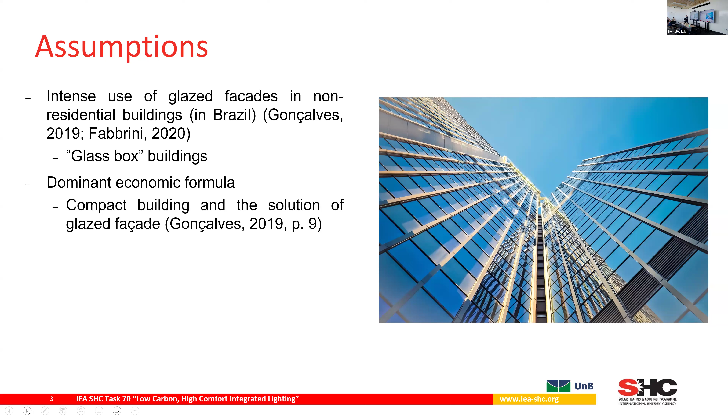Some of the assumptions of this work are that the intense use of glazed facades is very large, also in Brazil. Glass box buildings are very common, and of course the dominant economic formula is a compact building with glazing facades. If this is a problem for cold countries, imagine in sunny and hot climates the consequences.

We have problems related with glare and overheating, and this is one reason to study new, innovative materials for facades. In modern architecture we had a lot of clear glass, normally with shading protection.

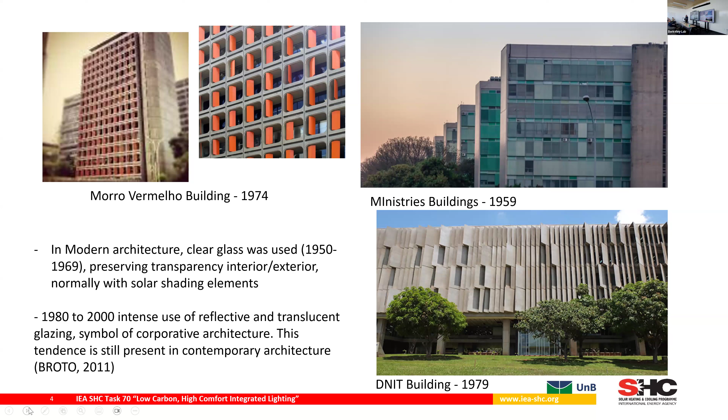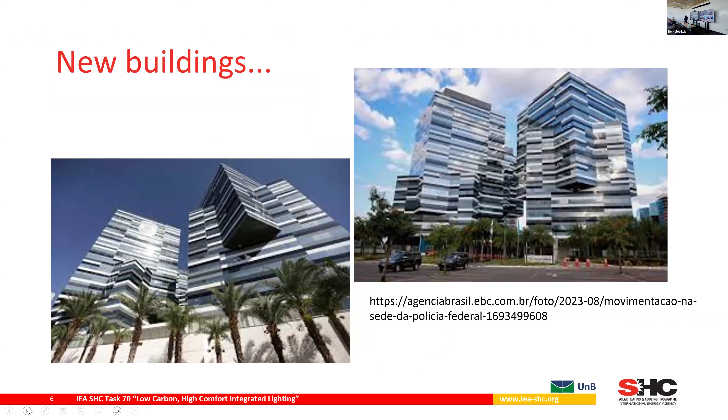From the 80s, there was intense use of reflective and translucent facades, but nowadays, especially in non-residential buildings, we have this trend of glazing facades. You can see many cities in Brazil with the same solution, both for new buildings and retrofits.

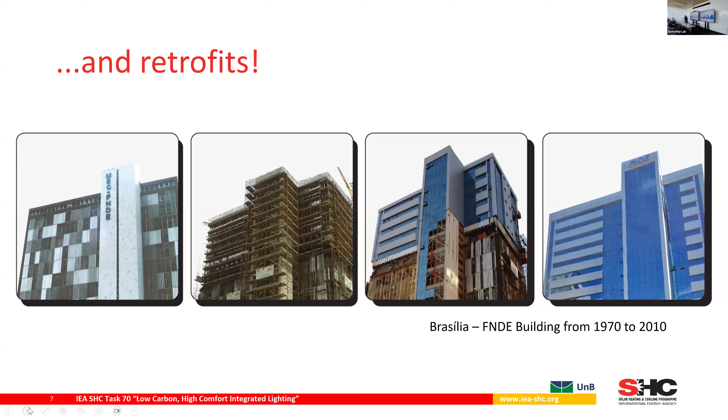This is a case in Brasilia where a building from the 70s was totally renovated with glazed facades. Here's another example. This kind of facade, with uniform and uncluttered appearance from the exterior, has a high market valuation, as we already discussed here.

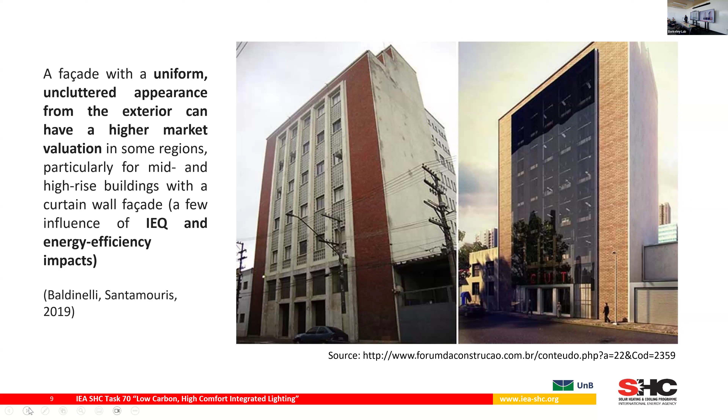And there is little consideration of environmental quality and energy efficiency impacts in these options. Of course we already know this, we've heard about it from Mandana and other speakers. The presence of windows is very important.

We need to have daylight, outside views, and also recently this new criteria to supply non-visual effects and circadian light. So electrochromic glazing could be a solution to balance circadian lighting and avoid glare.

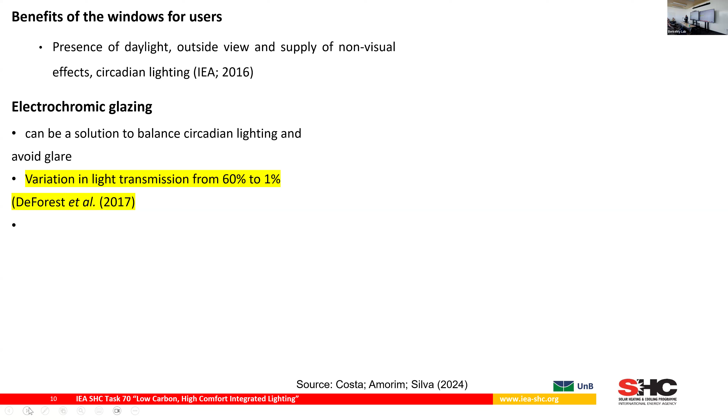We are trying to understand how it works in this kind of climate. Normally we have a variation in light transmission from 60% to 1%, from clear state to dark state.

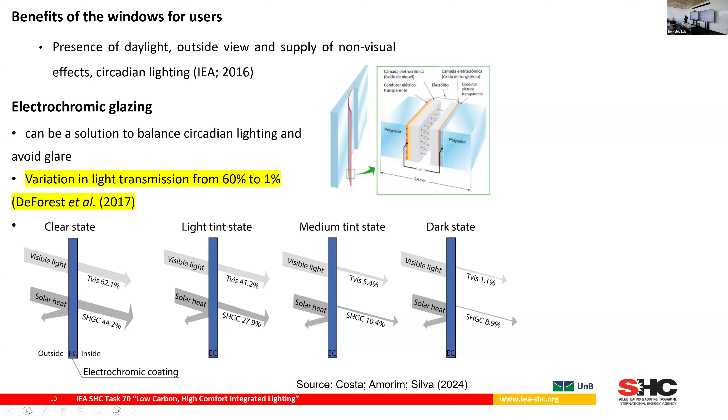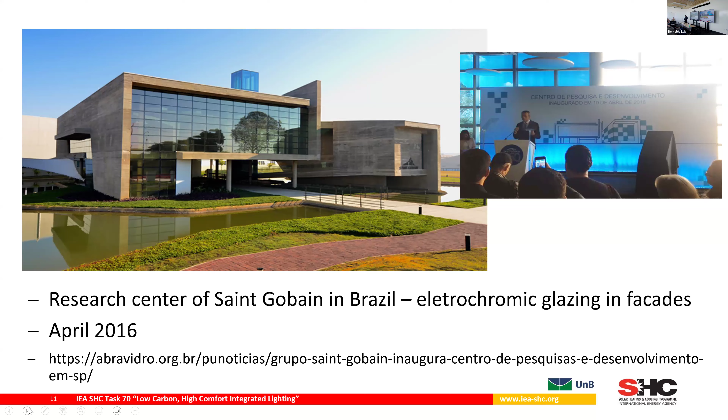This has been studied in many countries and climates, but it's not so common to have both visual and non-visual effect studies. We have a research center with Saint-Gobain in Brazil that has electrochromic glazing in facades, but it's not yet commercialized in our country.

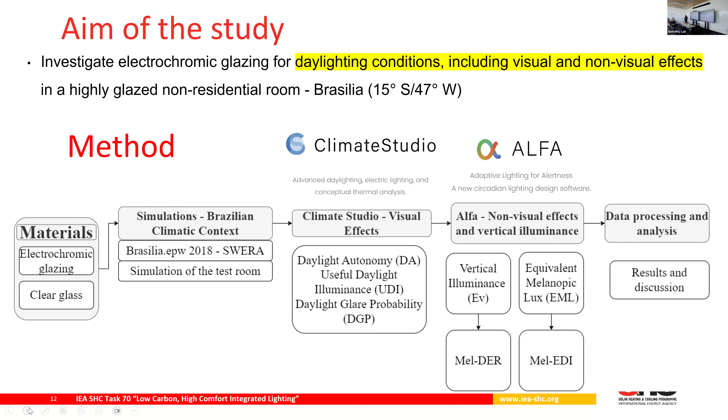We used Climate Studio for visual effects like daylight autonomy, useful daylight illuminance, daylight glare probability, and ALFA for non-visual effects. The simulations were done for Brasilia, in a representative non-residential office space in Brazil.

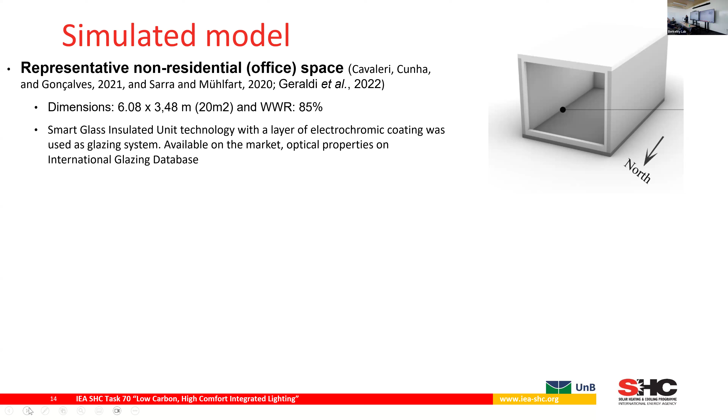This was defined based on other research. It's not a very big room, and we used a smart glass insulated unit technology with a layer of electrochromic coating as the glazing system, available on the market. We used optical properties from international glazing databases.

The simulated variables were the orientation, the glazing material—we compared electrochromic glazing with clear glass—and also the time.

Of course, we had dynamic simulations for the visual effects, but for non-visual effects we had to simulate solstices and equinox for each orientation, for a period from 8 a.m. to 6 p.m.

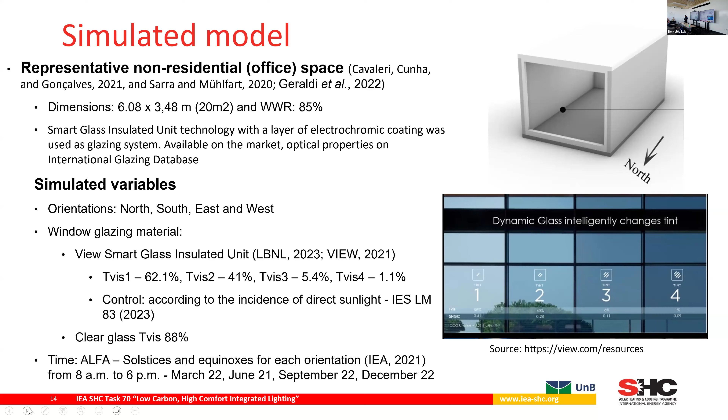This is the room and the optical properties—I won't go into detail here. We have an analysis grid with 9 points.

We evaluated illuminance on the horizontal plane and also vertical. For visual effects we used three well-known metrics: spatial daylight autonomy, useful daylight illuminance, and daylight glare probability. For non-visual effects, we evaluated melanopic equivalent daylight illuminance and the melanopic daylight efficacy ratio, which is more related to the spectrum of light, the fidelity of the spectrum.

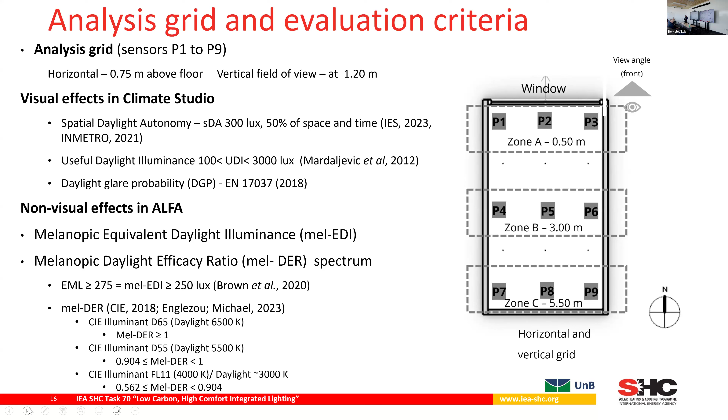The shading schedule is a first result. We can see there is a strong necessity of shading on the north facade in many months. This is due to the direction of the sun.

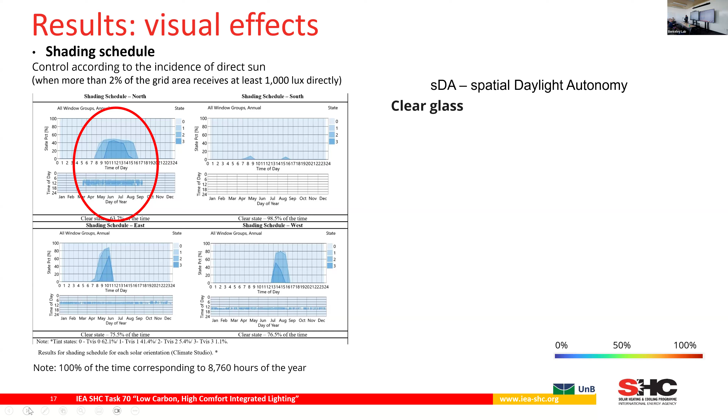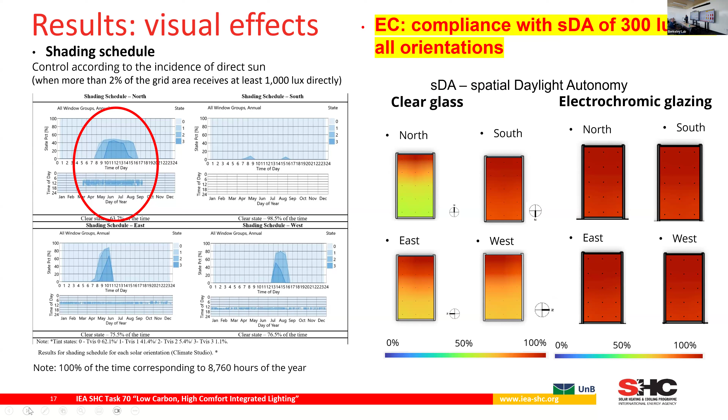If we compare clear glass with electrochromic glazing regarding visual effects, we can see that electrochromic glazing is very good. We had no problems achieving the first metric. Also for useful daylight illuminance, there was an improvement in this metric in all cases for electrochromic glazing.

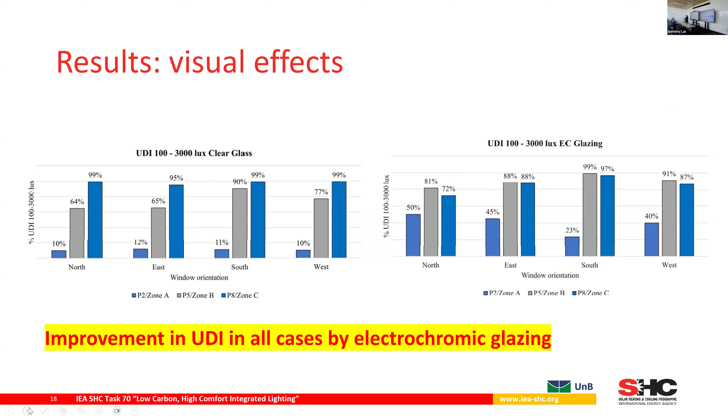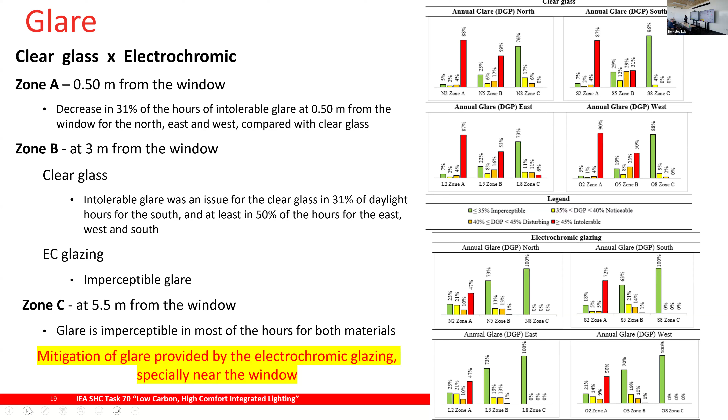Regarding glare, it's also very clear that mitigation of glare is provided by electrochromic glazing, especially near the window. We evaluated this by zone of the room.

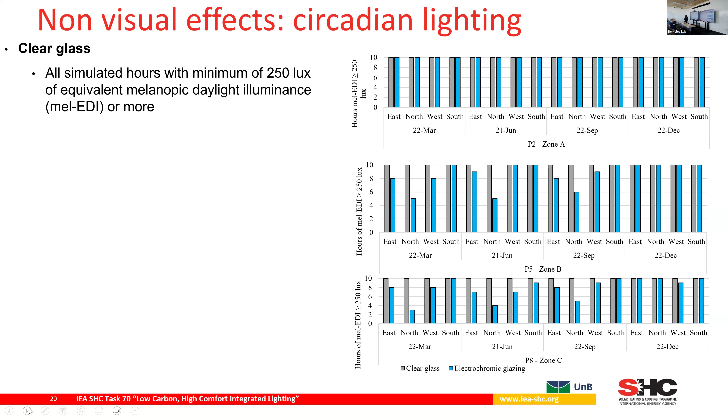For non-visual effects, we first evaluated circadian light. We could see that it depends on the position in the room and the window orientation—for example, north is not favorable. In general, electrochromic glazing performs better, but there is a gap for this specific orientation and glazing.

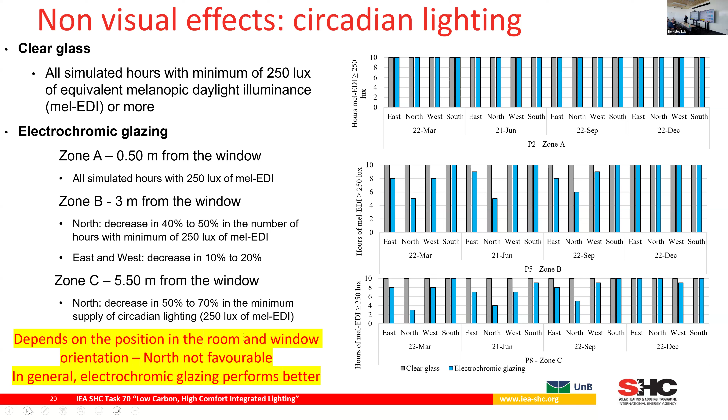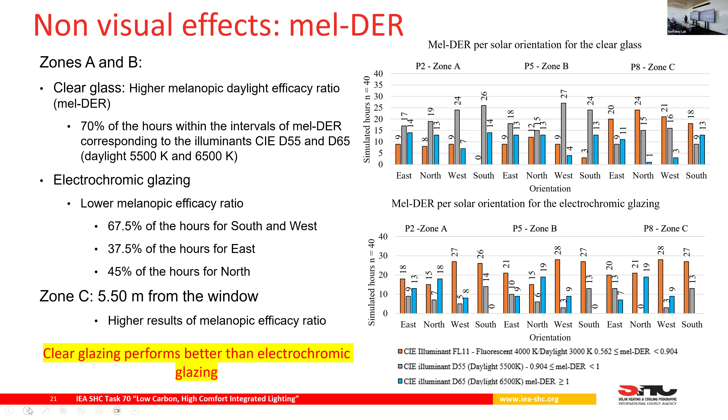Regarding the melanopic daylight efficacy ratio, we really found a problem because clear glazing performs much better than electrochromic glazing regarding this spectrum.

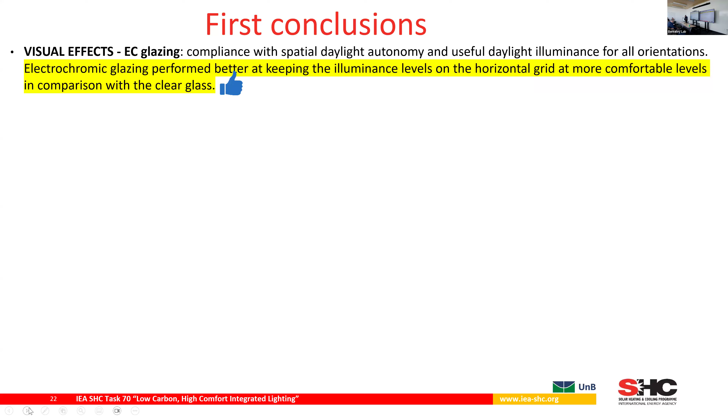To summarize the results: for visual effects, electrochromic glazing performance is good. It performed better, maintaining illuminance levels on the horizontal and vertical grids. The mitigation of glare was achieved—the shading schedule generated by electrochromic glazing avoided direct sun and prevented problems.

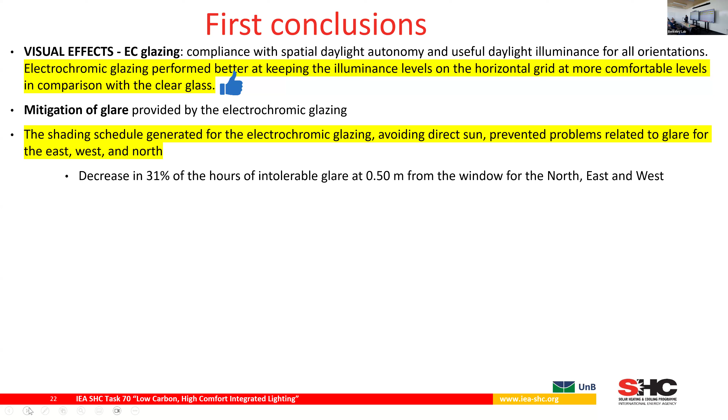Of course, there is a problem on the north facade because of excessive shading, and we begin to have problems with a lower supply of circadian light for the north orientation. So we have some disadvantage here—it's a point that should be reflected on—and definitely a lower melanopic daylight efficacy ratio.

We can conclude that regarding the spectrum, a lower melanopic daylight effect is observed for electrochromic glazing, so we probably have distortions of the spectral distribution of daylight. Generally, electrochromic glazing has a better balance between visual and non-visual effects, especially for visual effects, glare control, and circadian light.

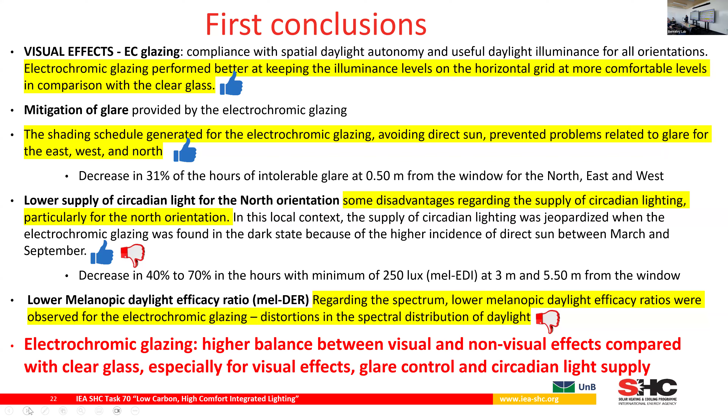The next steps of this research will be to simulate other sky conditions and latitudes, to see the results and put them together for a better evaluation of this product for Brazilian conditions—a hot climate, a very sunny climate. That's all, thank you very much.